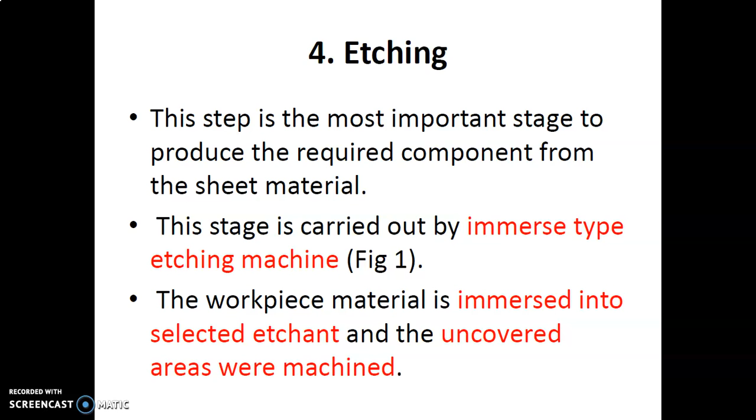The workpiece material is immersed into selected etchant, basically an etching material, and the uncovered areas are machined. So what will happen actually? Suppose you want to do the machining of some component, you want to produce some special shape. So rest of that part is covered, and the machining part is uncovered. So this chemical machining will be done on that uncovered part only.

This is a figure, you can see in this figure. This is the immerse type basically. This undercut, that is the uncovered part. Okay, and second there is a mask. So rest of the part is covered with the mask. So that part is not reacted with the chemical. It's basically acid. So it will dissolve in that pool of the chemical.

Here we have workpiece and the chemical reagent, and we are using the heater to increase the temperature and the stirrer. So a stirrer is used to continuously rotate that chemical, and it's a hanger type basically. It's hanging at some point. So this process is very simple.

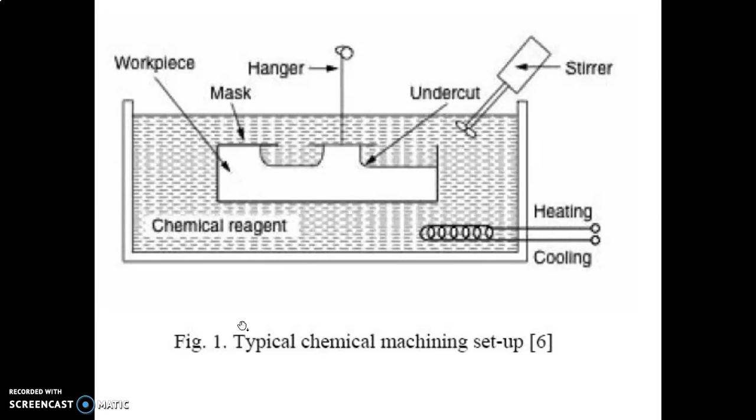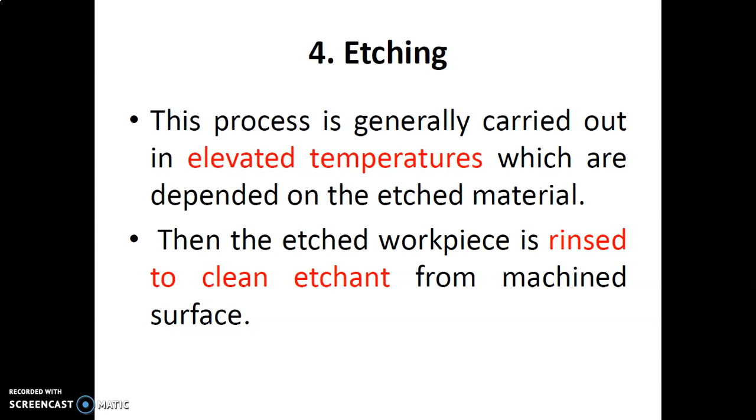This process is generally carried out at elevated temperature. So we are using the heater, which is dependent on etched material. Different material has a different temperature. Then the etched workpiece is rinsed to clean etchant from the machined surface. Basically, you can see this in the steps as we have discussed in last lecture. It has some pre-processing as well as post-processing.

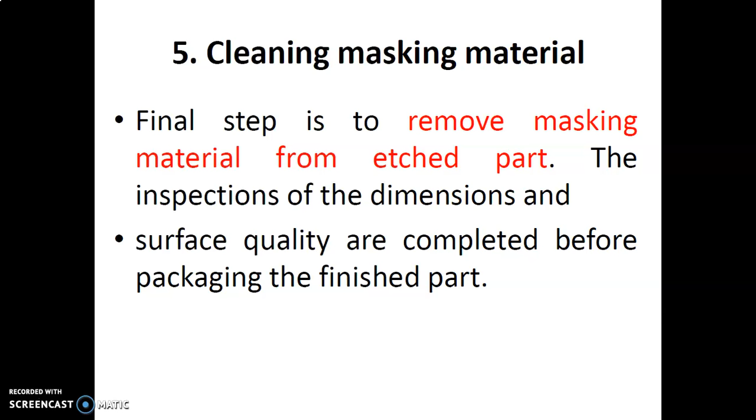Fifth is cleaning masking material. So final step is to remove the masking material from the etched part. The inspection of the dimension and the surface quality are completed before packing the finished part. So before, you have to prepare the component, and you have to remove the oil and dust from that, then masking, and you have to do the etching of the part, and after completing the machining process, you have to do the cleaning of the mask material.

So now next is a maskant. Basically masking material, which is called a maskant, is used to protect the workpiece surface from the chemical etchant. Polymer or rubber based materials are generally used for the masking procedure. The selected maskant material should have following properties: tough enough to withstand handling, well adhering to the workpiece surface. So basically masking is used to cover the surface which is not the part to be machined. So first you have to stick that material on the workpiece surface.

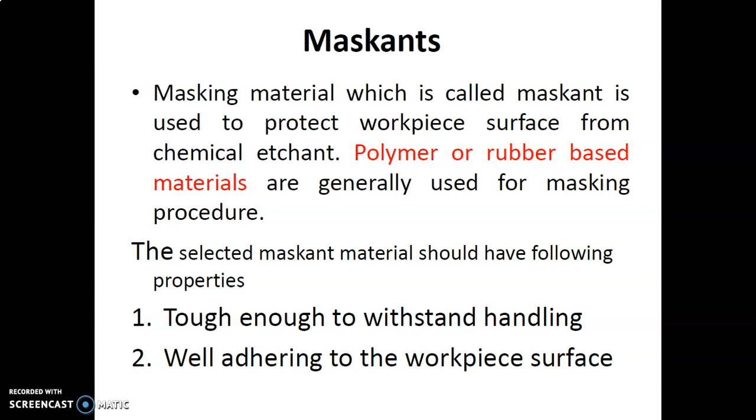So the properties which are required: well adhering to the workpiece surface, tough enough to withstand handling. Basically when we are handling the material, it should withstand. Okay, easy scribing, inert to the chemical reagent used, able to withstand the heat used during chemical machining. So this property is also important. Suppose you have selected any material which is not able to withstand a certain temperature. Okay, so it is not usable.

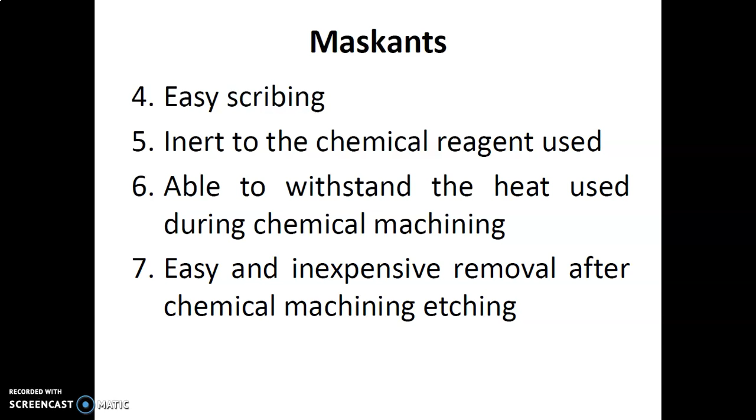So in this case, you have to select the specific material which can withstand a certain heat. Easy and inexpensive removal after chemical machining, etching. Multiple maskant coatings are used to provide higher etchant resistance. Long exposure time is needed when thicker and rougher dip or spray coatings are used.

Various maskant application methods can be used, such as dip, brush, spray, and electrocoating, as well as adhesive tapes. So we have different types of maskant material that are useful for different applications. Suppose your material is different, at that time you have to select some different material so it can withstand the temperature. If temperature is high, then you have to select a different material. So this step is very important. Maskant material is very important in case of chemical machining process.

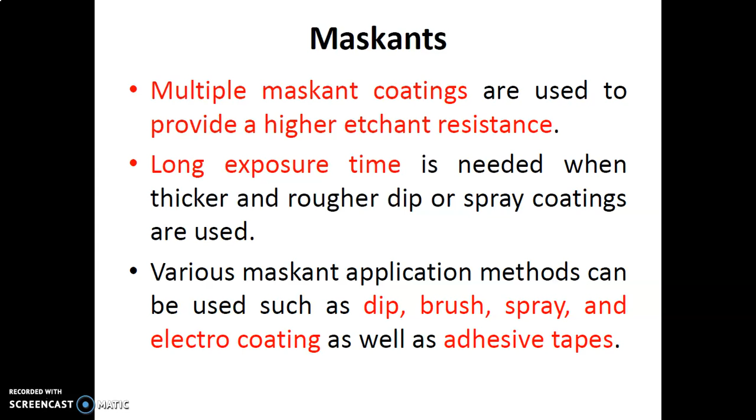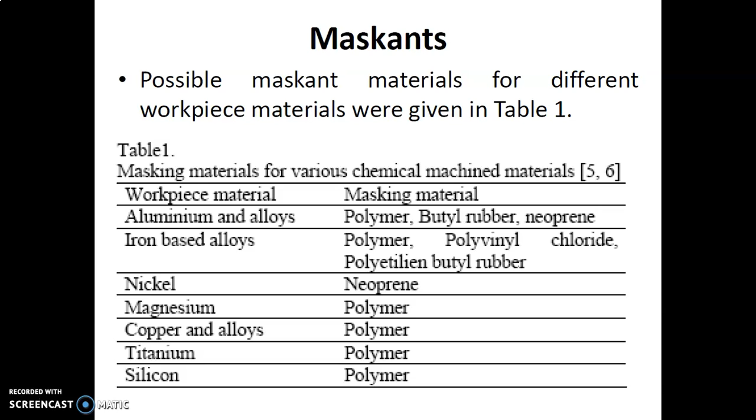You can see this is a list of the materials which are available in the market which can be used as maskant material for various workpiece materials. Suppose your workpiece is made of aluminum and alloys, in that case you can use polymer or butyl rubber, neoprene. Iron based alloys, polymer, polyvinyl chloride. Suppose your base material is nickel, neoprene. Magnesium, in that case you can use polymer. In case of copper alloys, polymer; titanium, polymer; silicon, polymer. So this is the basic table you can refer for the selection of the maskant material.

Now next part is etchant. Etchants are the most influential factor in the chemical machining of any material. Various etchants are available depending on workpiece material. The best possible etchant should have properties as follows: high etch rate, good surface finish, minimum undercut, compatibility with commonly used maskant. You can study these properties in detail, factors that you have to take care of during the selection of this etchant material.

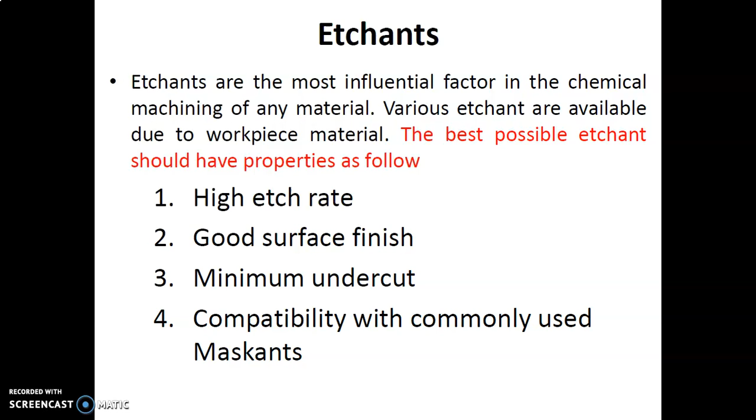So the first one is high etch rate, good surface finish, minimum undercut, compatibility with the commonly used maskant, high dissolved material capacity, economic regeneration, easy control of process, personal safety and maintenance. So these eight properties should be considered during the selection of the etchant material. You cannot directly select any material and do the etching.

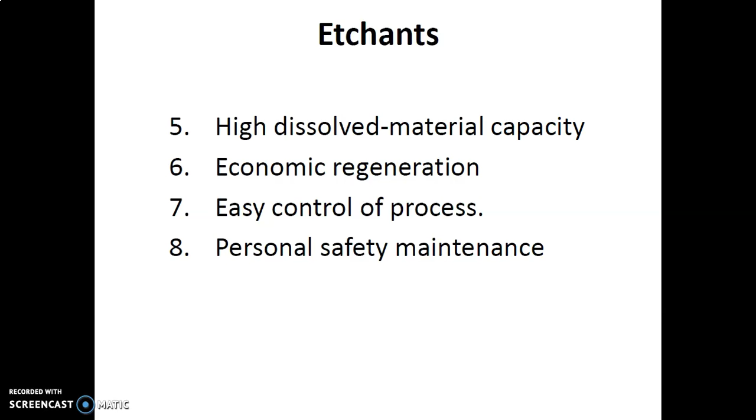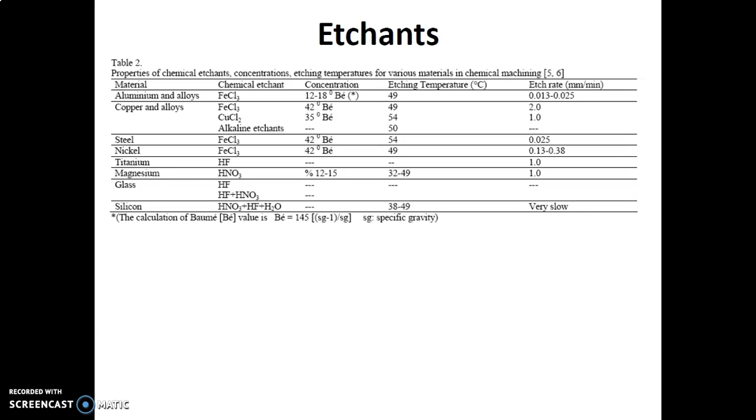So these are some materials presented in the table. Ferric chloride is the most widely used etchant in chemical machining. You can see ferric chloride is usable for aluminum alloys, copper alloys, steel, and even nickel. So most commonly we use this material, ferric chloride. It is mainly used for etching iron-based alloys as well as copper and its alloys, and aluminum.

Cupric chloride (CuCl2) is generally applied for copper and copper-based alloys in the electronics industries because various regeneration systems are available for the waste etchant. So this is the second example, cupric chloride. Alkaline etchants are introduced to the fabrication of electronic components such as printed circuit boards, PCB. So this etching is basically used in the electronics industry, mostly when you are manufacturing the PCB, printed circuit board. In that case we are using the same technology.